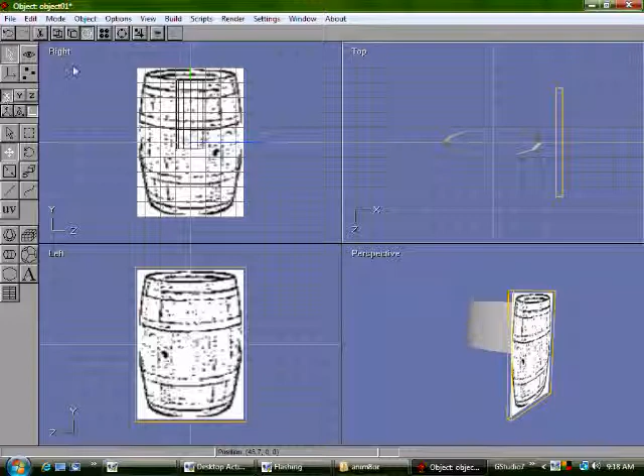Now we need to go back to our right view, go to view, right, go back to object point edit, and select vertex. Of course we just want the x-axis. We don't have to move these up and down anymore, we just have to uniform them out. So just kind of go out.

Remember how a barrel kind of lays, they're going to go out just a tiny bit. We'll have to edit this more once we get there, but for right now this is fine.

Alright, that's looking pretty good. Now click on that. Click on Object Edit, click on the mouse, click on the back reference image, and go ahead and just delete it. Get it out of the way.

Now you see we have kind of a beginning of a top part of the barrel. So the next thing that we need to do is, I'm kind of happy with the shape. I'm not going to go too in depth until it's completely built on changing up the shape.

So we're going to go back to our front view, and we're going to go back to object point edit, and we're going to click up right up here beside the point select. We're going to hit the edge select, and we're going to turn off our arc rotate and grab drag select, and we just want the top row of lines to be green.

What we do is we go to this little button down here, it's extrude faces, click on it and go down till you see it green, and once it's green you let go. That's all you have to do.

Now what you need to do is go to the top view. You see the top view, and you want to go to scale, and just scale it down just a tiny bit. This is going to act as our top of the barrel, the indentation that you would see on a barrel.

Then you go back to your front view after you've brought it in a little bit, and then you're just going to turn off the X and go just to Y axis and hit move. You want to move this down just a tiny bit. No, you want it to be right there. Yeah, about right in there.

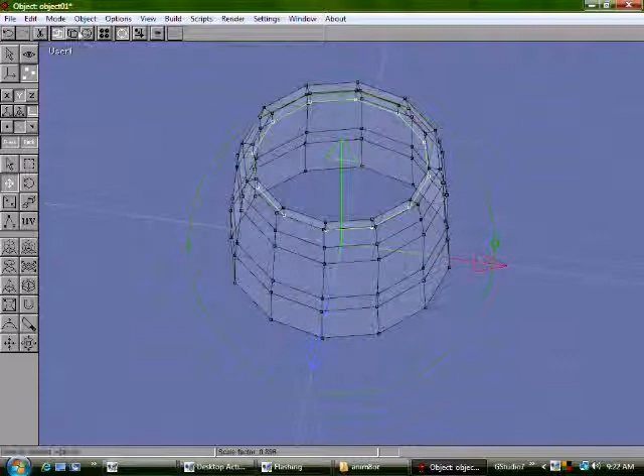Now when you do the 3D rotate, you see that we have the lip of the barrel. Let me put it more solid so you can see it. See, now we have the lip of a barrel.

Well, that's not too much helpful because now we need a lid. Well, not a problem. So what we do is we go to the user view, which is using the arc rotate. We turn off arc rotate. We want to make sure that we're in a solid view. It's a little bit easier to see the ticks sometimes this way, and I kind of use it.

Next, what we need down here on the bottom is this little tool. It's called Add Edges. We click on it. It's a little line tool. You click on one, select a tick, and you click on the other one, or other point, and it makes a line.

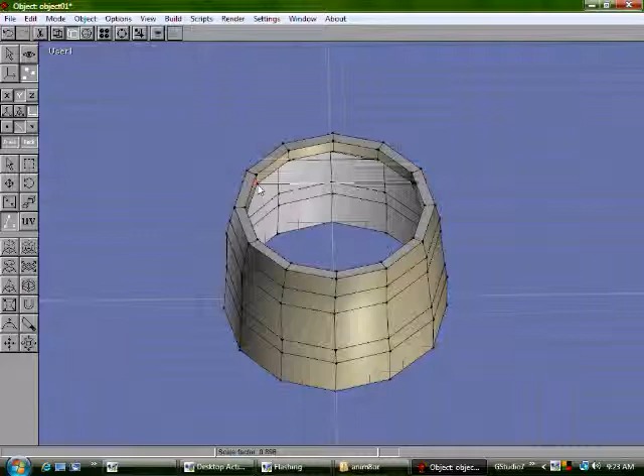You go to this one over here, to this one over here. Be careful about which ones you're selecting. If you're not sure, zoom in and look, and make sure that you got the same point that you need.

Now the next thing we're going to do, we're going to go to wireframe on this one to get a good look. Point here probably, and a point here probably. So we go to wireframe, and here's the points. Point and point. Be careful on which ones you select. They can be confusing. So point here, the point here.

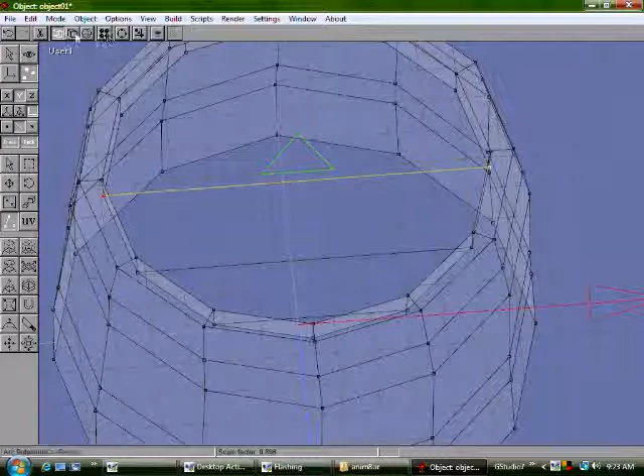And then you go back to this view and you make sure that you got the right point. And I did. Okay, and then now we can see the other points fairly easy, so they're not that bad. Boom, boom, and done. Alright, now we go to the select tool. Now, selecting lines.

Up until this point, you really haven't had to do this too much. What you have to do now is fill in these holes, because you can see right through it, and they need polys or faces, so textures can be drawn on them.

So if you use the left mouse button to click on this line, you see how it highlights. But if I click on another one, it takes the selection away from the other one I selected, so I need to use the right mouse button to select these. And let's say I accidentally selected the wrong line - that's okay. If you hold Alt while you hit the right mouse button on the line, it takes it away without removing the other ones you've selected, so you don't have to start again.

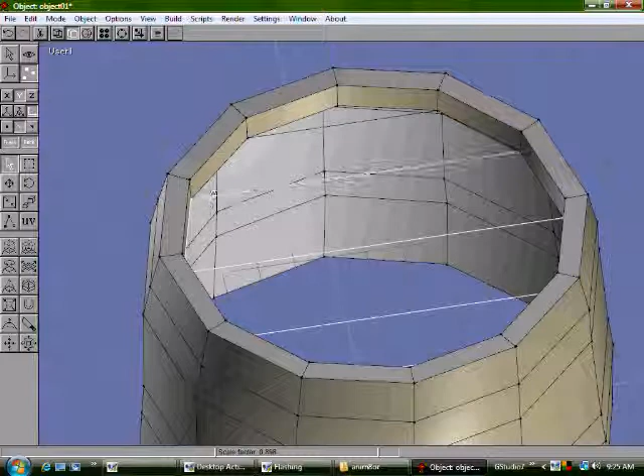Go ahead and start selecting all your lines and make sure that all of them are selected. You can rotate, move it around, make sure that you get all your lines, all the way around, and make sure that they're the right ones. Then you just do a 3D rotate and make sure. Alright, looks like we got them all.

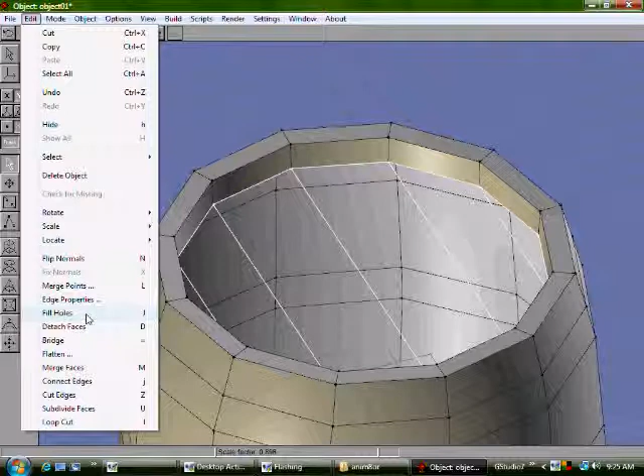Next, we undo the rotate, and we go to Edit, and down here to the bottom that says Fill Holes. You hit it and boom, now we have polys. And if you click off, you see that they're gray just like the rest of them. Alright, go back to front view.

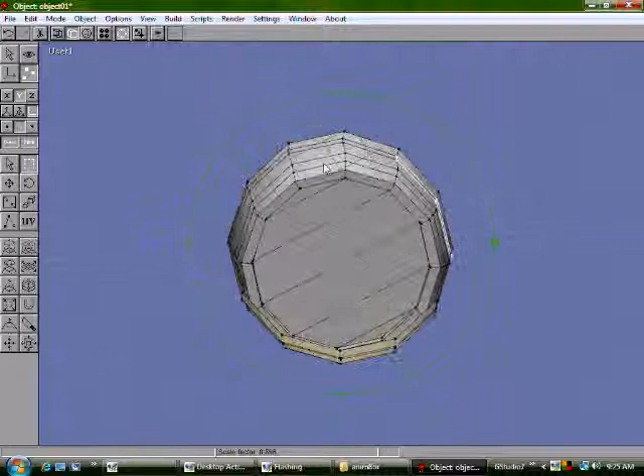You're like, well, that's all fine and dandy, but how in the world is that going to help us? Because it's just half of a barrel. What's half of a barrel going to do? Well, probably not much. So what we need to do - and I'm not sure about the actual barrel, but the barrel has been used in RPG after RPG after RPG, and I would think that back in those days they had some kind of a vault, but apparently people love to put food and money and magical items in it.

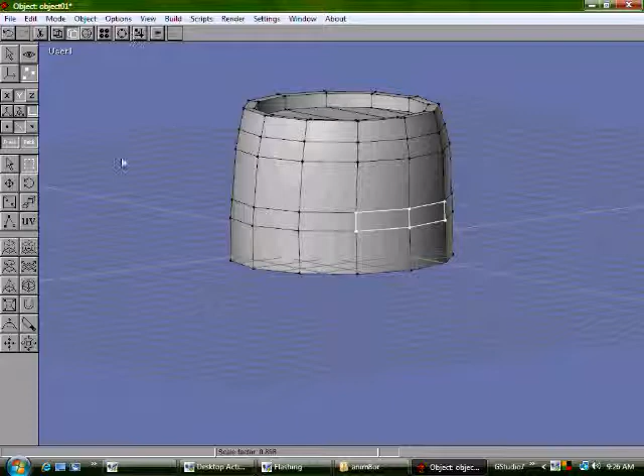Who knows? Alright, so the next thing we need to do is go back to the front, and we want to zoom out a little bit so we can get a better view of our barrel here. We want to go to Object Edit, which is the mouse cursor thing up here at the top. We want to select our object, then go to Build, then go to Mirror. If you look up here, it says Build, and the axis is selected on X.

We don't want X, we need Y, because we want it to build downwards. Just hit OK, and boom, now we have another one. We select it, select on this, and then we need to drag it down just a tiny bit to where they're almost touching. That'll be fine right there, and they're all lined up.

Next thing we need to do is sew them together. First, we have to select both of them using the right mouse button, then the left mouse button, and then we go to Build and Join Solids. This is important. Now once you've done that, it's pretty much ready to be edited.

You go back to your points, your little point view, make sure that they're selected. You can rotate your camera a little bit if you need to, get in a little bit closer, so you make sure you get the right points. Then left mouse, right mouse, go to Edit, Merge Points, and clear this out and just put the value of 5 even. Then when you hit OK, you see that they merge together.

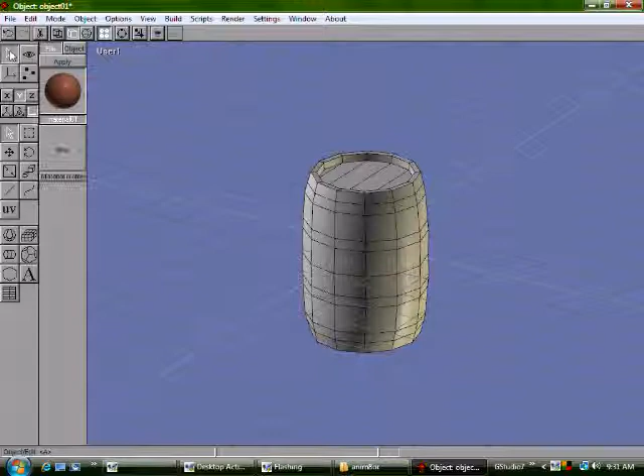Go back to Object, Edit. Make sure you got the Select tool. And you apply. Now that we have wood, doesn't look all that great.

We need to go to UV. Click on UV and you see normally that takes care of it. Now of course we don't have slats or whatever in this barrel, I'm not going that in depth. If you look, it just looks kind of like a solid wood barrel.

It'll be fine. First thing I notice, there's a lot of gloss to it. Wood, unless it's really polished, doesn't have a lot of gloss. So go to specular and just turn it off. Put it on 0, and you'll notice the glare is completely gone now. And we don't need glare - it's wood, there wasn't lemon pledge back then.

Alright, so the next thing we need to do is we need to make the rings. So let's go over here and again go to Diffuse and Load Texture and Metal Rust. Hit OK, Metal Rust - I got that texture out of the GameStudio WAD, and OK. And now that you see it's here, we'll check out the properties later.

Alright, next we need to go to flat shade it, which will show us our faces. We need to go to select mode, and then we need to go to face select, which is the other out of 3 that we haven't used yet. Click on it and you can see that we can now, same way as we click on everything else, start with the right mouse button.